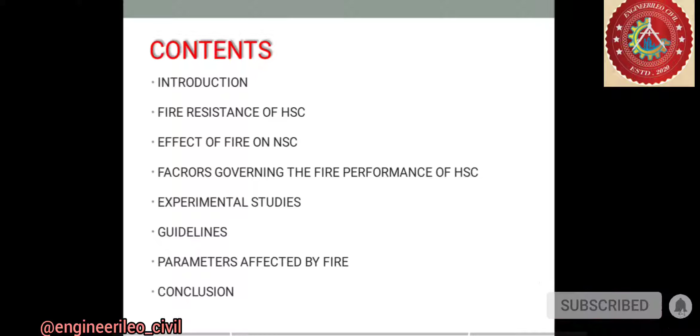In this topic we are going to learn about fire resistance of high strength concrete. Basically, what is high strength concrete, why do we need it, what are the effects of fire on normal strength concrete, what factors govern the fire performance of high strength concrete, experimental studies, guidelines, case studies, the parameters affected by fire, and finally the conclusion comparing high strength concrete and normal strength concrete, which is better and which is not. We're going to study about that.

First is our introduction. You might be thinking, what is HSC or high strength concrete? High strength concrete is a type of high performance concrete, generally with a specified compressive strength of 40 megapascal or greater, and the compressive strength is measured at 56 days or 90 days or some other specified age depending upon the application of that concrete.

Now we are going to see why we need high strength concrete. The basic need is to put the concrete at service at a much earlier age. The second need is to build high-rise buildings by reducing column sizes and increasing available space. The third is to build the superstructure of long span bridges and to enhance the durability of bridge decks. One of the major uses of high strength concrete in buildings is for columns.

In recent years, the construction industry has shown more interest in the use of high strength concrete. This is due to improvements in structural performance such as high strength and durability that can be provided as compared to normal strength concrete or low strength concrete. Recently, the use of high strength concrete, which was previously in applications such as bridges, offshore structures, and infrastructure projects, has been extended to high rise buildings.

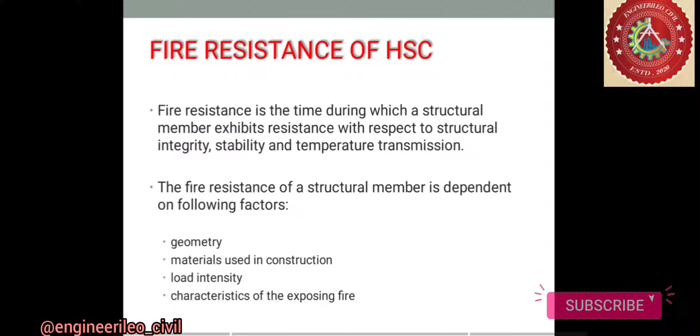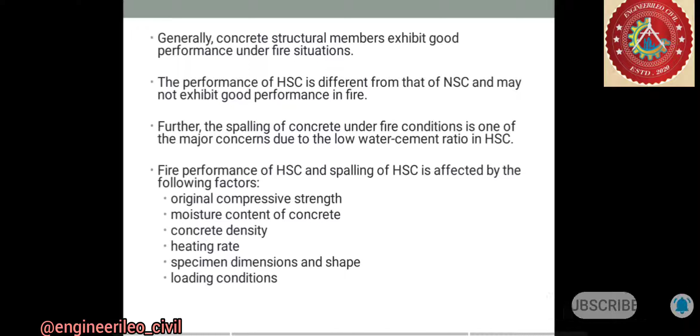These factors are geometry, materials used in construction, load intensity, and characteristics of exposing fire. Generally, concrete structure members exhibit good performance under fire situations. Further, the spalling of concrete under fire condition is one of the major concerns due to low water cement ratio in high strength concrete. Fire performance of high strength concrete and its spalling can be affected by the following factors: original compressive strength, moisture content of concrete, heating rate, loading condition, concrete density, and specimen dimension and shape.

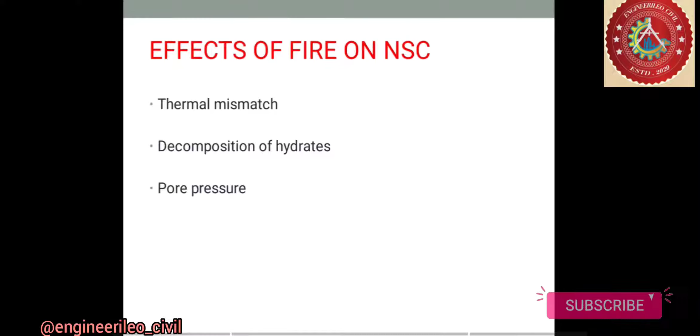Now we are going to learn the effects of fire on normal strength concrete. There are three major effects: first is thermal mismatch, second is decomposition of hydrates, and third is pore pressure. We will go into details.

What is thermal mismatch? When a normal strength concrete member is exposed to fire, a temperature gradient across the depth of the section will be built up. The thermal expansion of the outer layer of concrete under high temperature is partially restrained by the inner layer under lower elevated temperature, and this generates tensile thermal stresses in the concrete. The steeper the temperature gradient, the higher the thermal stresses. Concrete is a brittle composite material consisting of binder, cement paste, and fine and coarse aggregates.

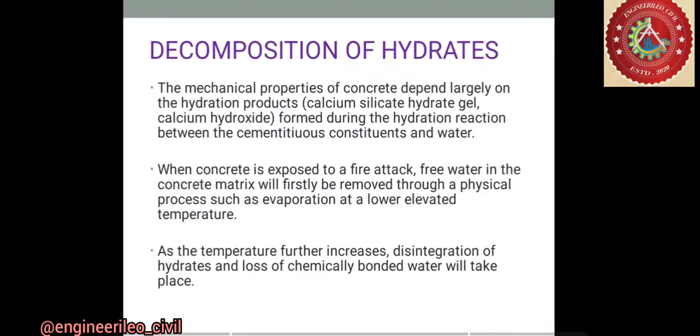Now we are going to learn about decomposition of hydrates. The mechanical properties of concrete depend largely on hydration products like calcium silicate hydrate gel and calcium hydroxide, formed mainly during the hydration reaction between cementitious constituents and water. When concrete is exposed to fire attack, free water in the concrete matrix will first be removed through a physical process such as evaporation at lower elevated temperature. As the temperature further increases, disintegration of hydrates and loss of chemically bonded water will take place.

The decomposition of calcium hydroxide occurs at about 350 degrees centigrade. Then the partial volatilization of calcium silicate hydrate gel commences at about 500 degrees centigrade. The pore size and porosity of the hydrate matrix will increase, and mechanical properties like strength and elastic modulus of the hydrates will be weakened. Moreover, at 573 degrees centigrade, the crystal structure of quartz in siliceous aggregate transforms from a low temperature phase to a high temperature phase. Such transformation is accompanied by approximately 1% volume increase, which accelerates the disintegration process of the hydrates.

Now we'll go on to see what pore pressure is.

Pore pressure developed in heated concrete is derived from the evaporation of water within the porous media and from the decomposition of C-S-H gel and calcium hydroxide.

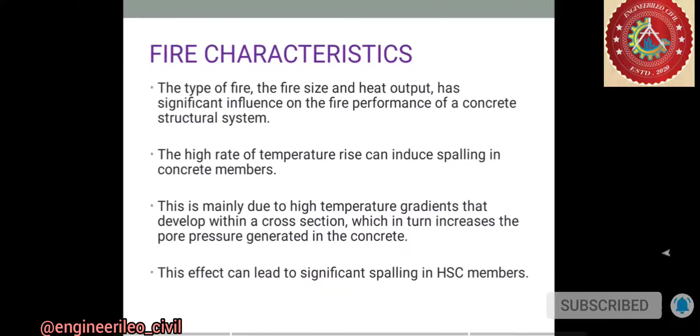First of all, we'll see what is fire characteristics. The type of fire, the fire size and heat output have significant influence on the fire performance of a concrete structural system. The high rate of temperature rise can induce spalling in concrete members, mainly due to higher temperature gradients developing within a cross section, which in turn increases the pore pressure generated in the concrete. This effect can lead to significant spalling in high strength concrete.

Now we are going to see the material characteristics. First, the concrete strength. Strength of concrete has significant influence on fire performance of concrete members. The higher the strength, the higher the probability of spalling. Further, the loss of strength with temperature is higher for high strength concrete as compared to normal strength concrete.

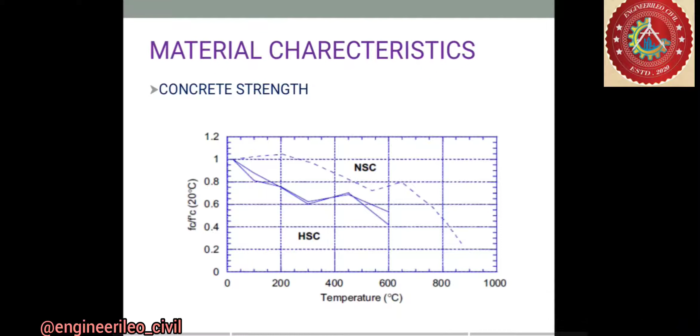It can be seen that the rate of loss of strength is higher and significant for high strength concrete over the entire temperature range. In addition, the fire-induced spalling for high strength concrete is significantly higher than for normal strength concrete.

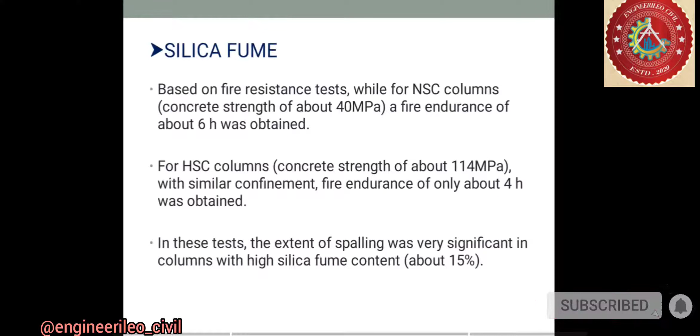Now we are going to see the silica fume. Based on fire resistance tests, for normal strength concrete columns with concrete strength of about 40 MPa, fire endurance is about 6 hours. For high strength columns with concrete strength of about 114 MPa, a fire endurance of only about 4 hours was obtained. In these tests, the extent of spalling was very significant in columns with high silica fume content, about 15%.

The higher the silica fume content and associated compressive strength increase, the greater the extent of spalling, leading to decreased fire endurance. This could be attributed to the fact that the addition of silica fume appears to reduce permeability of the concrete, restricting the loss of moisture during curing, drying, and fire test.

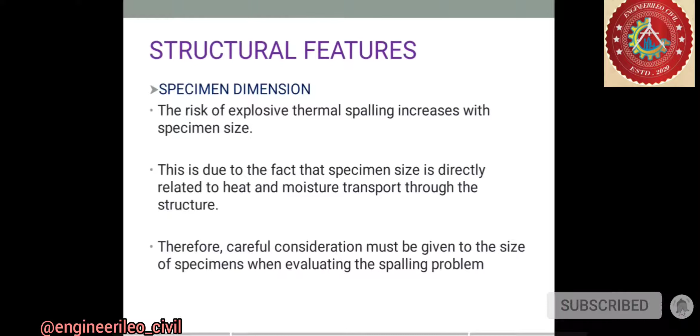Now we are going to see some structural features. The risk of explosive thermal spalling increases with specimen size. This is due to the fact that specimen size is directly related to the heat and moisture transport through the structure. Therefore, careful consideration must be given to the size of specimen when evaluating the spalling problem.

Lateral reinforcement: higher fire endurance in high strength concrete columns can be achieved by providing improved tie configuration, provision of bent ties at 135 degrees bent back into the core of the column, and increased lateral reinforcement with closer spacing. You may see in the diagram the lateral reinforcement, first in the conventional tie configuration and second in the modified tie configuration.

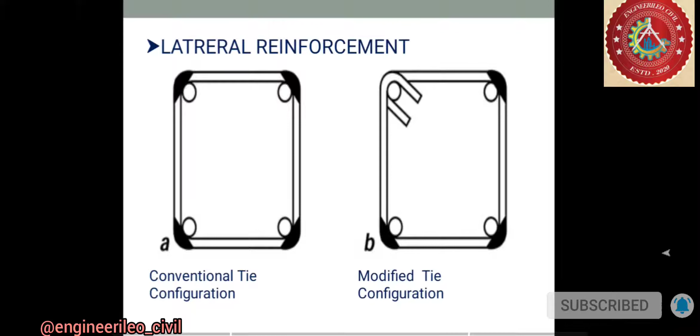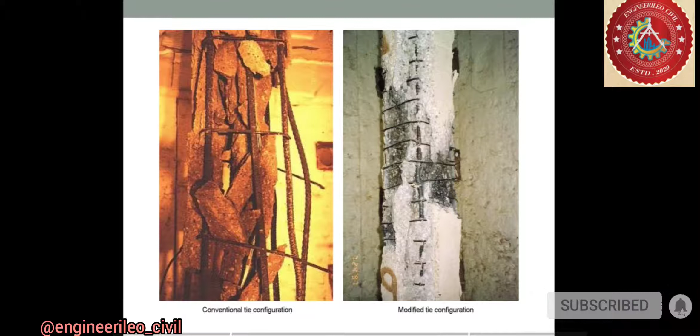These improved tie provisions also minimize the extent of spalling in high strength columns. This increased fire endurance and reduced spalling is mainly due to ties holding the longitudinal rebars firmly in place under fire exposure conditions. Columns containing only 90 degree ties would typically lose a significant portion of the column section upon failure. Here you may see the diagram for conventional tie configuration and modified tie configuration, showing the difference in failure.

Now we are going to see the load intensity and type. The fire endurance of a reinforced concrete column increases with decreasing load. This has been confirmed through a number of fire tests where a loaded high strength concrete structural member was more susceptible to higher spalling than an unloaded member.

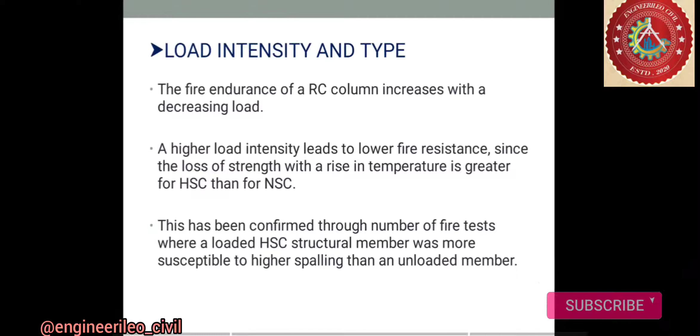Now we are going to see a case study or experimental studies. The basic information is provided here; you may read or go through it. Some of the basics are: there are 3 reinforced concrete columns.

2 of them are high strength concrete and 1 is normal strength concrete. The cross section is 305 mm size and columns are 3810 mm long, and the dimension of the cross section and others are given in the table.

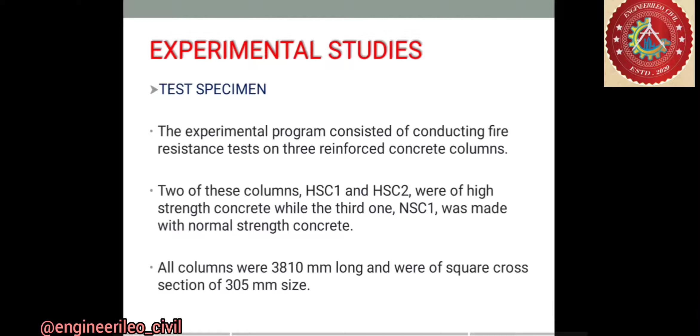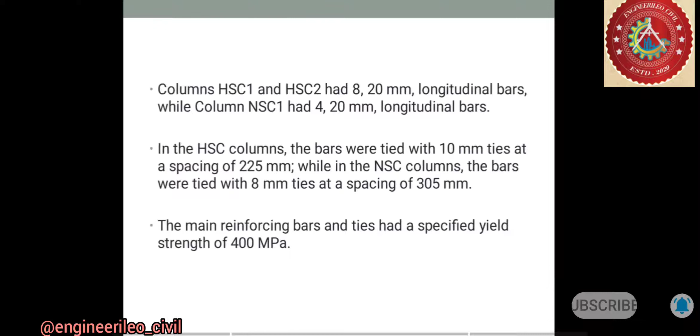He has taken 2 high strength concrete columns with 8 bars of 20 mm longitudinal reinforcement, and a normal strength column with 4 bars of 20 mm longitudinal reinforcement. In the high strength column it is 10 mm ties spaced at 225 mm. In the normal strength column it is 8 mm ties spaced at 305 mm.

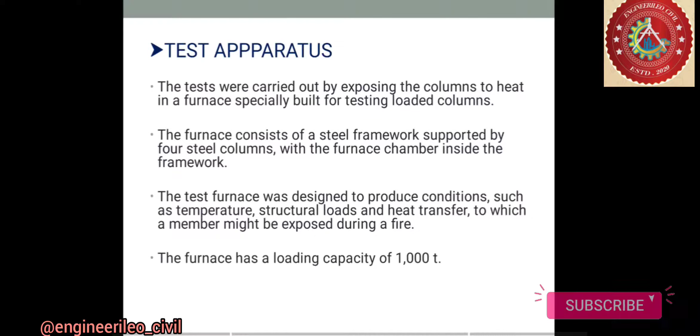Now we are going to see the test apparatus: the heat furnace, specially built for testing loaded columns. The furnace consists of a steel framework supported by 4 steel columns, and the test furnace was designed to provide conditions such as temperature, structural loads, and heat transfer to which a member might be exposed during a fire. The furnace has a loading capacity of 1000 tons.

Now we are going to see the test conditions and procedures. The columns are installed, and the end plates are installed by bolting to a loading head at the top and the hydraulic jack at the bottom, then fixed, so the columns are in fixed conditions.

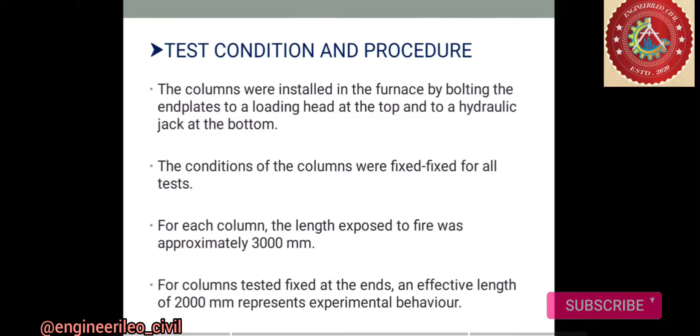For each column, the length exposed to fire is approximately 3000 mm, and the effective length is 2000 mm. For the high strength concrete column, first it is subjected to 2000 kilonewton load, second is subjected to 1700 kilonewton load, and third is subjected to 1067 kilonewton load. The load was maintained constant throughout the test.

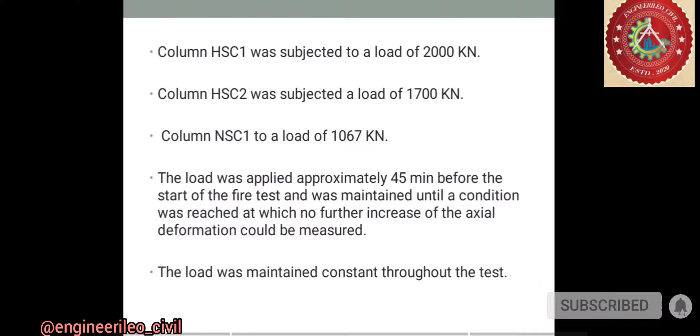Now we are going to see the results and discussion. The temperature time curves for external surface and for various depths in concrete are plotted. For all 3 columns, the temperatures inside the column rose rapidly to about 100 degrees centigrade, and then the rate of increase of temperature decreased.

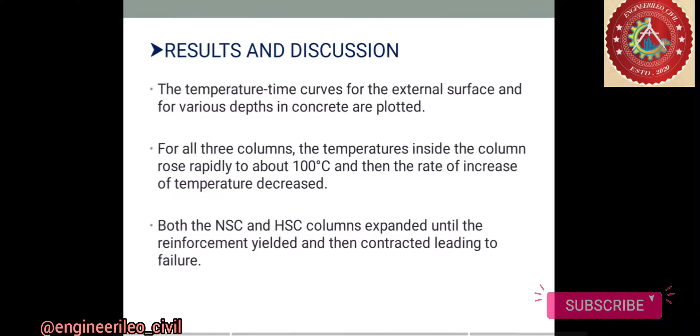It can be seen that deformation in the high strength columns was slightly less than for the normal strength column. Initially, deformation of the column was mainly due to thermal expansion of concrete and steel, while the effect of load and thermal expansion is significant in the intermediate stages. The effect of creep becomes pronounced in the later stage due to high fire temperature.

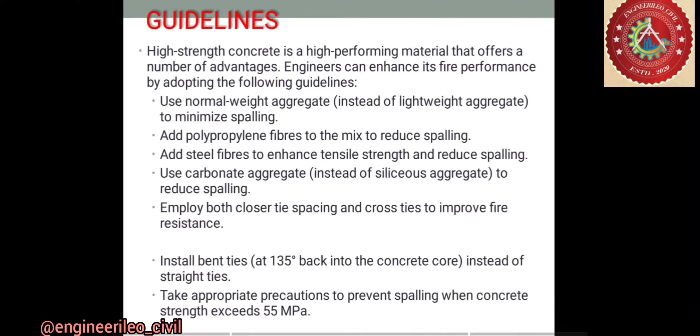Now we are going to see the guidelines. High strength concrete is a high performance material that offers a number of advantages, like use of normal weight aggregate instead of lightweight aggregate to minimize spalling, adding steel fibers to enhance strength and reduce spalling, employing both closer tie spacing and cross ties to improve fire resistance, and taking precautions to prevent spalling when concrete strength exceeds 55 MPa.